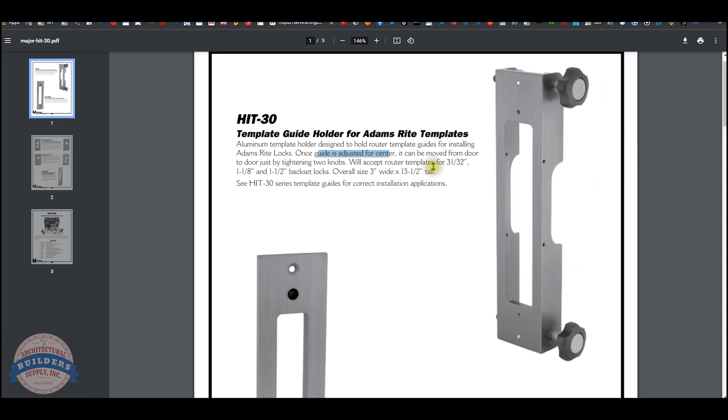So the HIT-30 template guide holder for Adams Rite templates, aluminum template holder designed to hold router template guides for installing Adams Rite locks, etc. Once guide is adjusted for center, it can be moved from door to door by just tightening 2 knobs. It will accept router templates for 31/32nd, 1 1/8, and 1 1/2 back sets. Overall size. Then they have a series of templates here that are intended for this unit.

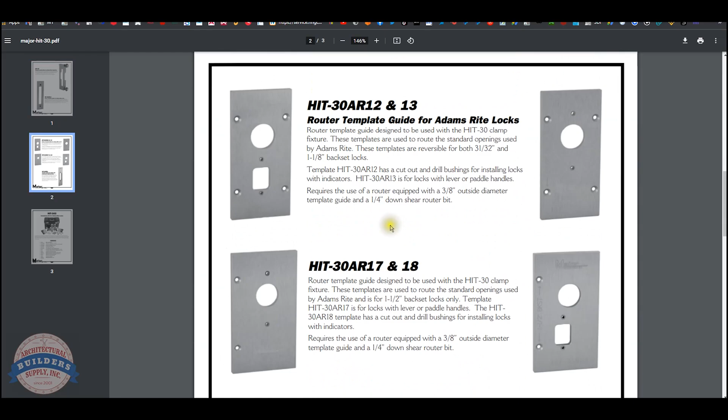And we had called out these holes here. Well, if you're going to prep for an Adams Rite lock, it's nice to be able to do the lock body itself. There's no doubt about that. It's also nice to do the function holes as well: cylinder, visual indicator, lever, push paddle, things of that nature.

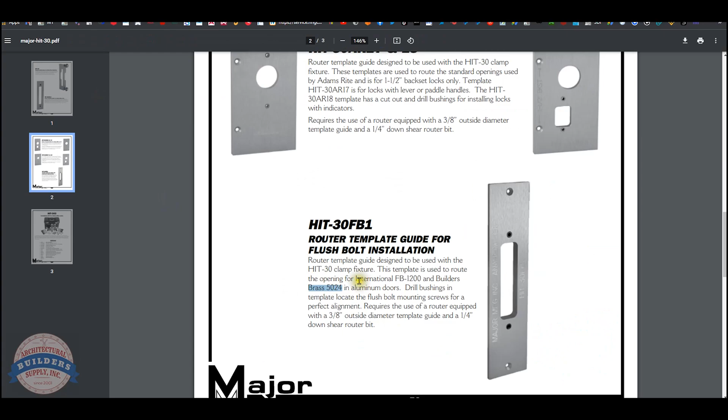Apparently this router template guide can be used for flush bolt installations as well. My guess is that this is for those flush bolts that are 4.5 inch or 4.25 inch tall. I can show you what I think one looks like. I don't know exactly what those units are referred to in the catalog, meaning I don't know what a builder's brass 5024, or an international FB 1200 is, but I'm going to guess that's this odd offset bolt.

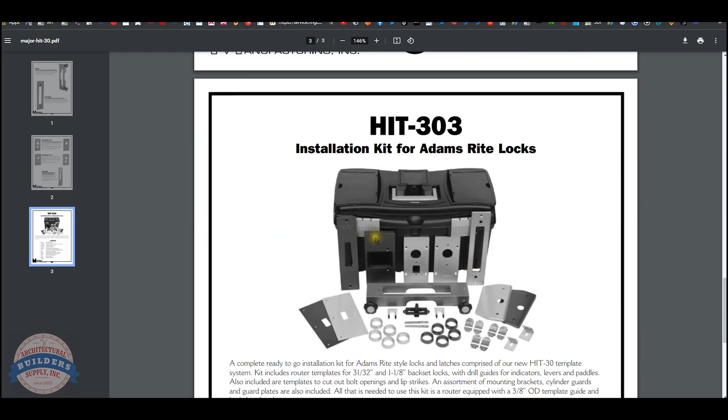You can get a whole kit of this material. That's handy if you're doing aluminum storefront work. This is going to allow you to do a lot of jobs right out of the box. There's no doubt about that.

Yeah, something like these. The LMB-034, 033, for bevel doors and radius. The radius might work for flat as well. So what that's going to do is allow you to accurately drill the hole for this. Right there is what you need.

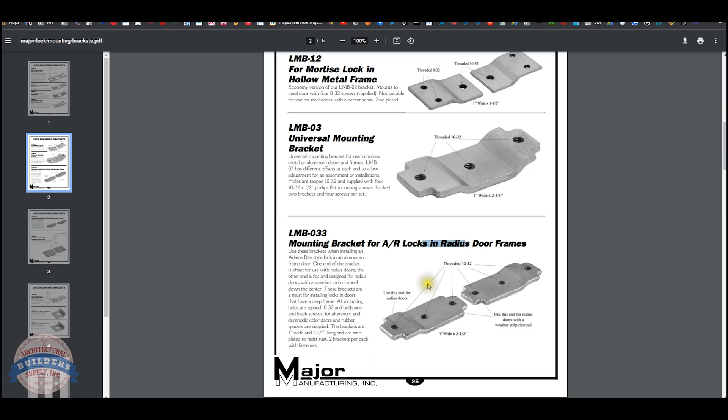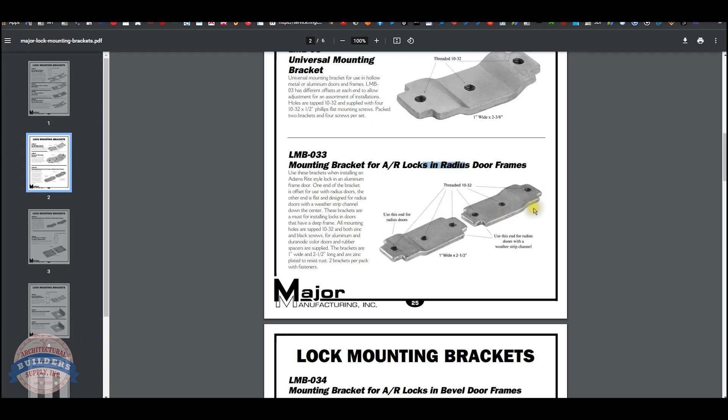Okay, let's see what part number you would use for a square edge or a non-beveled door. In radius and beveled. Yeah, I believe that you're going to use this for... sorry, I had to study that a little further. Here, one end of the bracket is offset for radius, the other end is flat, designed for radius doors.

With a weather strip channel down the center. That's helpful. We need to find out what's the bracket that we're going to use for the flat or square edge doors. So let me find out what that is, and we'll continue this video.

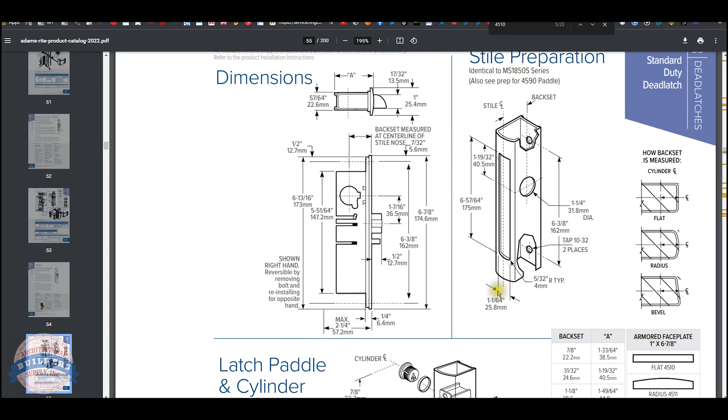So I had also mentioned looking at the Adams Rite templates for typical locks. Let's pull up a catalog and look at the 4510 series standard duty dead latch. Again, it's 1x6 and 7/8 for the prep. So 6 7/8 is the height of your lock body, and they have 1 1/64 of an inch in the width. So this would be a typical Adams Rite lock that you'll install.

That catalog was just, you know, anywhere you find Adams Rite, there'll be a manufacturer's link, and the catalog page is on that link, generally about here. All right, so we're doing the HIT-30AR11. HIT-30 clamp fixture we've covered, the faceplate size we've covered, mounting brackets, etc., we've covered that. These brackets are a must for deep style doors.

I have a feeling that they're referring to the mounting tabs. Anyway, it requires the use of a router equipped with a 3/8 outside diameter template guide and a 1/4 inch down shear router bit. Now let's talk about what that means.

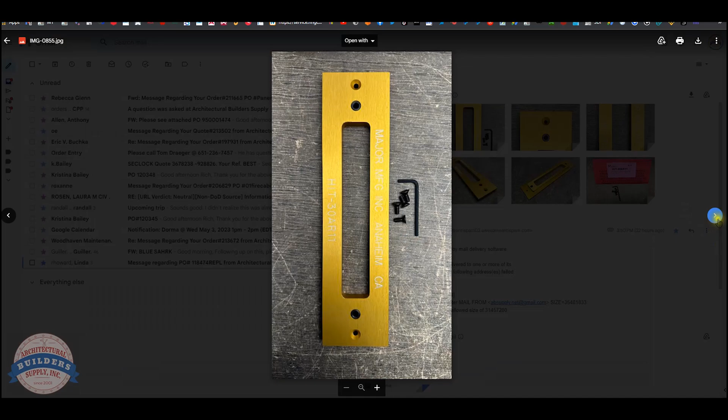Before we get to that, let's take a look at the photographs that we have. There's the packaging.

Now the outside diameter template guide and the 1/4 down shear router bit. Forgive me, I went a little too quickly. The link here to the product brochure, we've looked into that. It doesn't give us that information on what is required, even though this paperwork here does. By the time you're seeing this video, we'll have included links here and here to the necessary information.

At this time, we can find it by clicking here to the manufacturer's page within our site, and from here we can pull up not only all of the major products we sell by means of this horizontal navigation as seen here, but also a link to the manufacturer's website, as well as a link to the product catalog.

Let's take a look in the product catalog, and let's just type in guide because that should get us close to the section of where the guides are. There we are. This is on the 73rd page of the catalog.

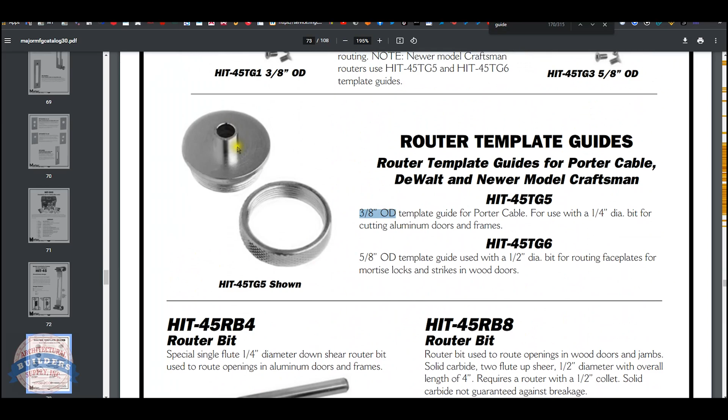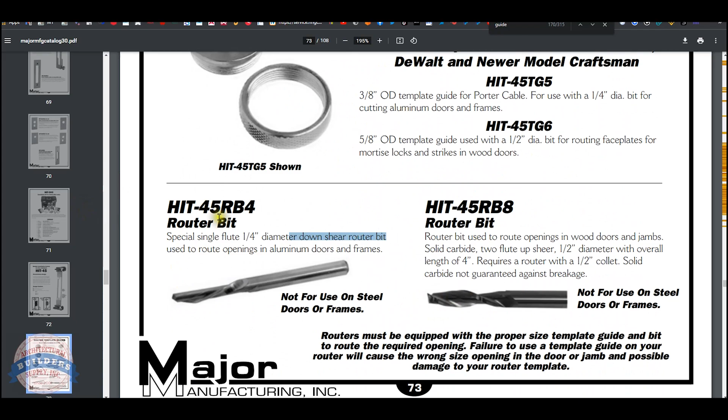Router template guides for Ryobi, for Sears, Porter Cable, DeWalt, Craftsman. So what you need is a 3/8 OD, where the OD is 3/8. It's what you have to have. Here, or here, or here. That requires the use of the 1/4 inch down shear router bit, which is the HIT-45RB4. By the time you're seeing this video, we'll have highlighted links here and here to those items.

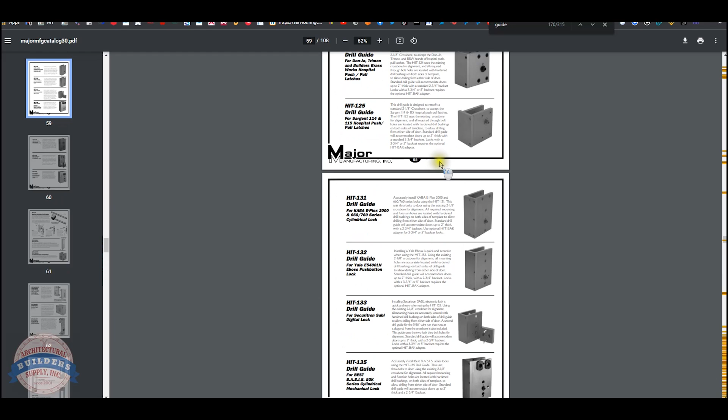Now the rest of this catalog is extremely handy because it will allow you to review all things jig, template, fixture, lock installation aids, from Major. The second half of the catalog is full of it. The first half is full of security hardware, ways to prevent control of entering a key into a knob, lever, call it a key block. They're key traps, but these are boxes that require the use of 2 different keys in order to get that box open, is what that's for.

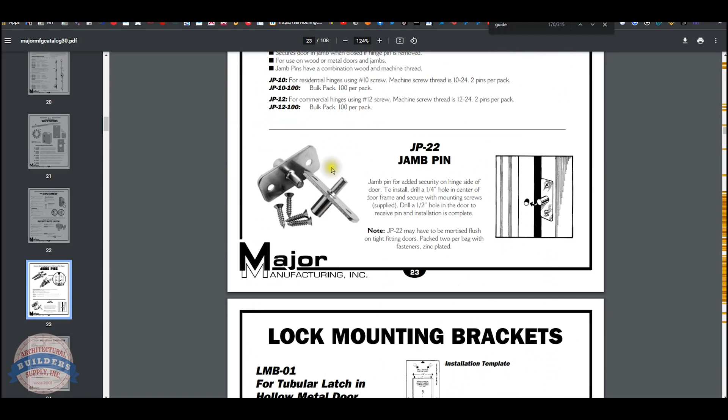Cylinder guards with latch protectors, reinforcement strikes, sliding door locks, jamb pins. This is basically a poor man's version of a non-removable pin hinge. Really simple - you drive the pin out and you still can't pull the hinge out. Wood applications as well, where you're not going into a hinge. This can be added on any swinging door on the hinge side. Lock mounting brackets, as we have discussed at length, etc.

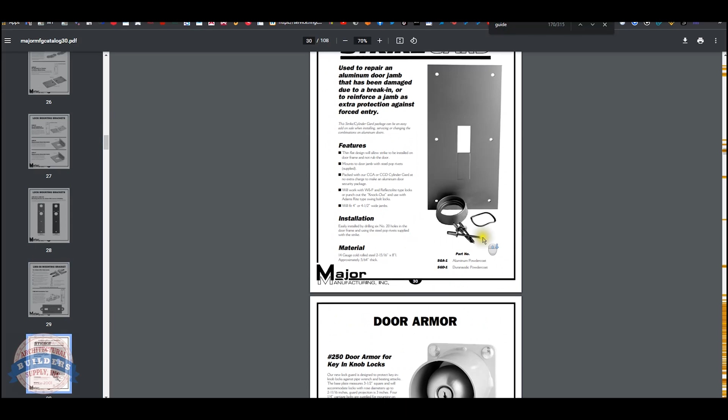Now let's get back to it. In conclusion, that's everything about the HIT-30AR11. In that catalog, you'll see that there are different guides and templates for use on doing this sort of work. If you're going to go so far as to get the HIT-30 and be able to do the mortise pocket as well, you might as well buy the additional templates that you'll need for doing the function holes.

No reason to be measuring that off by hand. The only thing you really have to do is strike your center line. Now this has an etched line right here. Obviously what you're going to want to do is verify that is the center line from here to here, but from the top of the door to the center line of your lock body, that's what you're going to line that up against.

A combination square, a pencil, maybe a scratch awl, but you don't want to damage anything. If you're going to put a scratch awl on the door, you're going to make sure you're going to router off that part that you've scratched. I'd be using a pencil is what I would be doing, lining that up.

How you arrive at the center line is going to be based on what you're starting with. Is there already a strike prep in the frame? If there is, you've got to backwards engineer that into what the vertical height is going to be on the door. If you're starting with nothing, where are you going to put it at? Do you want to match other locks within the space? Is there a concern for handicap compliance so that you've got the cylinder height at a proper range off of the finished floor and whatnot?